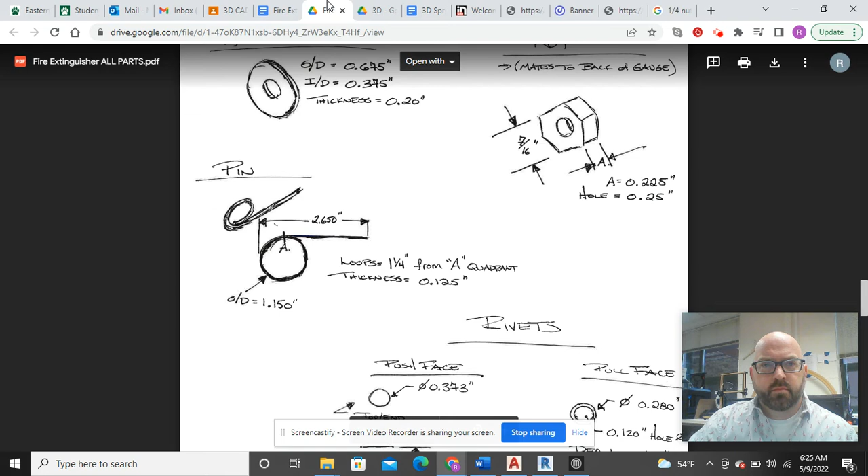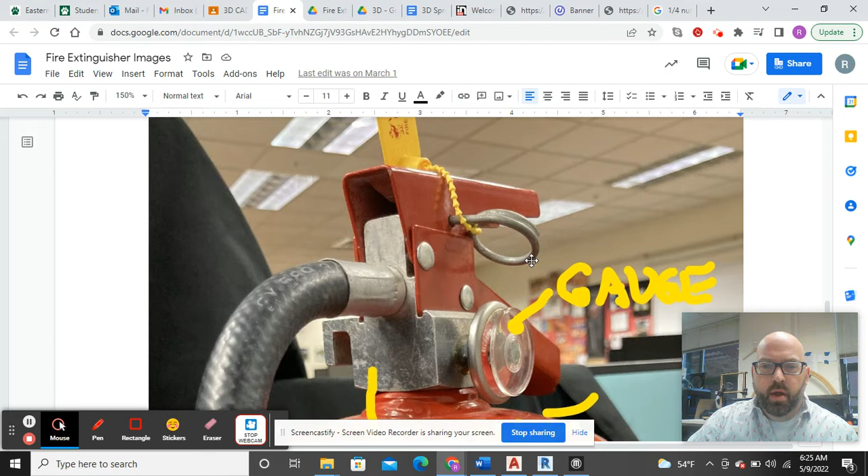All right, so getting down to the end of, or almost the end of some of the smaller parts, the next part I'm going to draw is the pin. And the pin right here is the thing that you pull on the fire extinguisher. When you pull this pin, this top handle, when you grab it, you can squeeze this together. And what it does is it opens a valve so that the ingredients, the stuff inside the fire extinguisher, rushes out of this hose. With the drawing itself, I did a little sketch here.

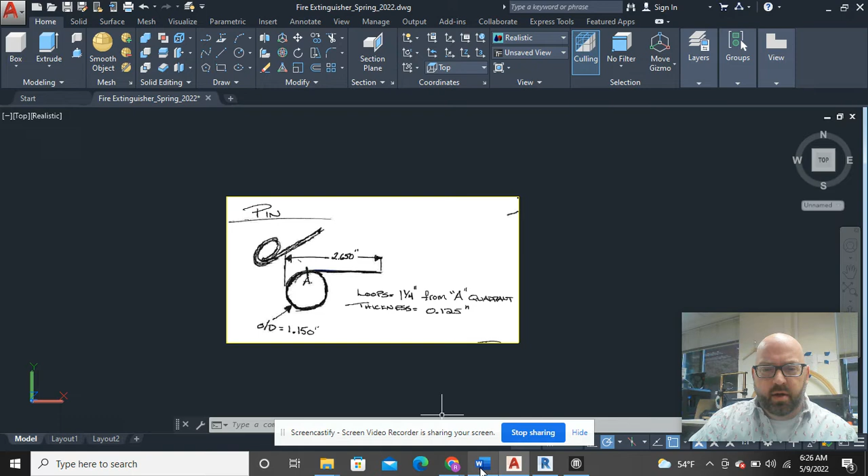It's an eighth of an inch in thickness, so it's just a piece of round stock bent at an eighth of an inch. There's an overall distance. There's a distance you have to calculate, and there is a diameter for the pin itself. And there is a little trial and error on this, and so I will try to remember my trial and error. But the one thing going back here is that there's this one note, and it says loops 1 1/4. It says inches, but what I should have said was turns. Or circumferences or something from a quadrant.

So you can see what I did was I marked A, and A is the intersection of the point where the pin is in a straight line, and then the second portion of that is where the loop on the spiraled portion ends. So if I look right here and I start my mouse, I say, okay, the pin is going straight through the handle, and that's all straight. And it gets to here where my cursor is, and that's what I called quadrant A.

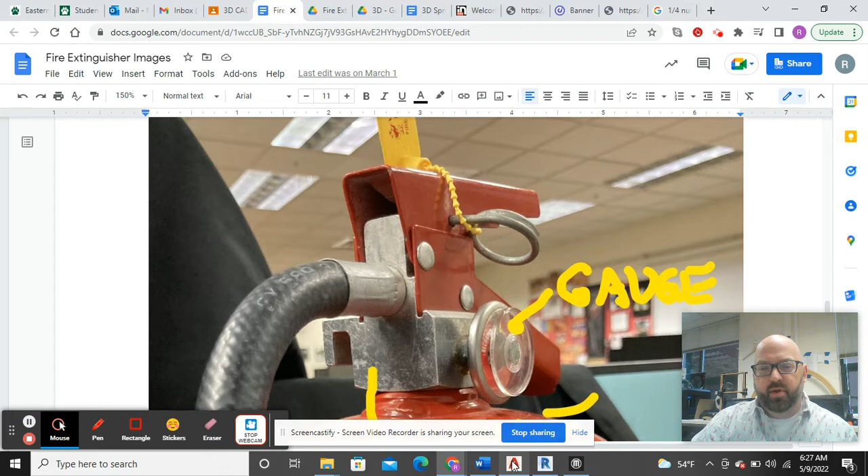If I follow the loop around, it goes all the way around, and then it hits quadrant A, and that's one loop. And then it passes quadrant A, and if you look how far it goes down, if we called this like quadrant B, that would be a second loop. Or if we said, okay, this is starting at the 12 o'clock position, it goes down to 3, comes down to 6, goes up to 9, comes back to 12 o'clock, and then it keeps bending until it gets to 3 o'clock. Okay, so this involves some slicing, some unioning, some sweeping, and exploding, and everything else.

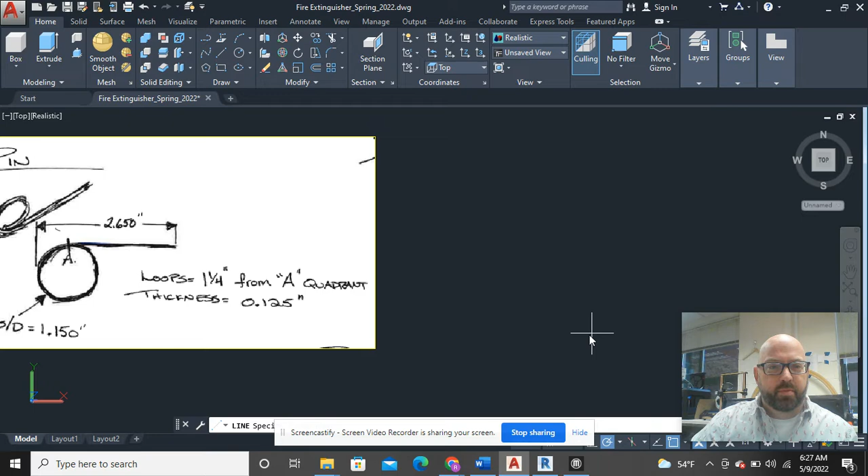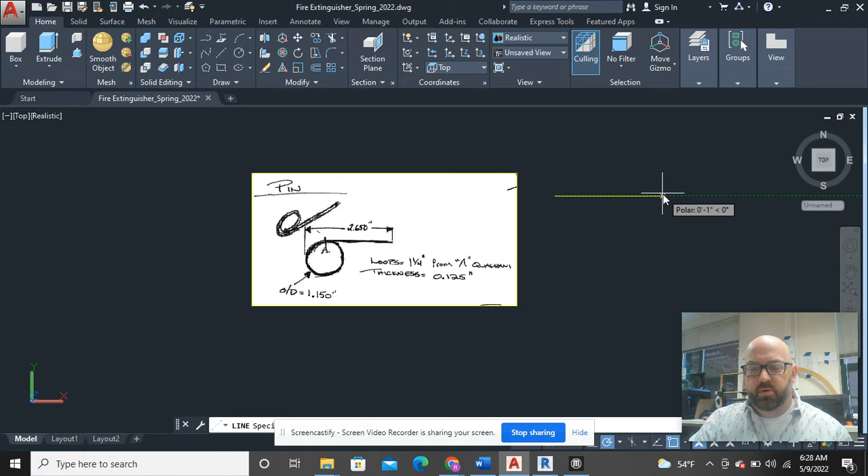So I'm going to start myself off with something to kind of contain my parts. And so I know that the outside diameter of this is 1.150, okay? And I know that the overall distance is 2.650, okay? Not 26.50. Whoops. Line 2.650. Okay. So there's that. Maybe I should have made this a little bit bigger.

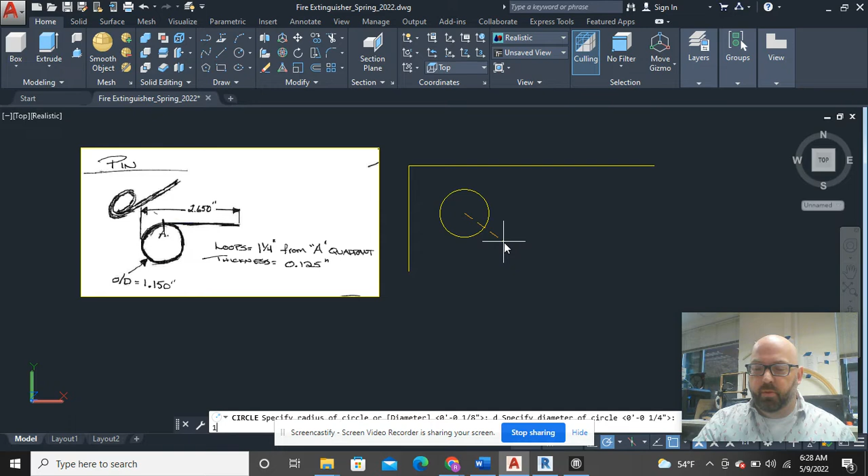And I know that I have right here, straight down from this, this end of it just coming down, and I'll just draw this into space. This is flush. This is where my diameter of 1.150 should exist, down here. So I'll go diameter of 1.150, and what I'm going to do is do 2 moves. One move is going to be, I'm trying to get it pushed down so it's straight away right there. It's intersecting. And then I'm going to do one other move, keeping polar on from this quadrant to here, and that's intersecting.

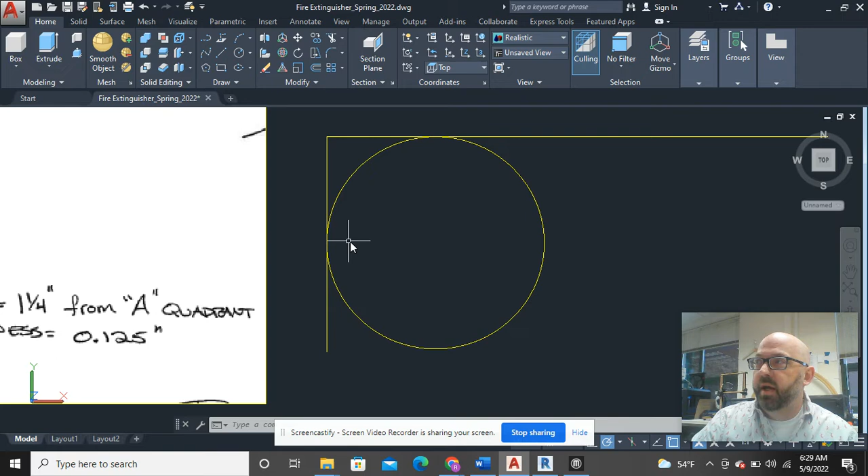Hey, Mr. Bank, can I get back with you? I'm doing a video right now. Cool.

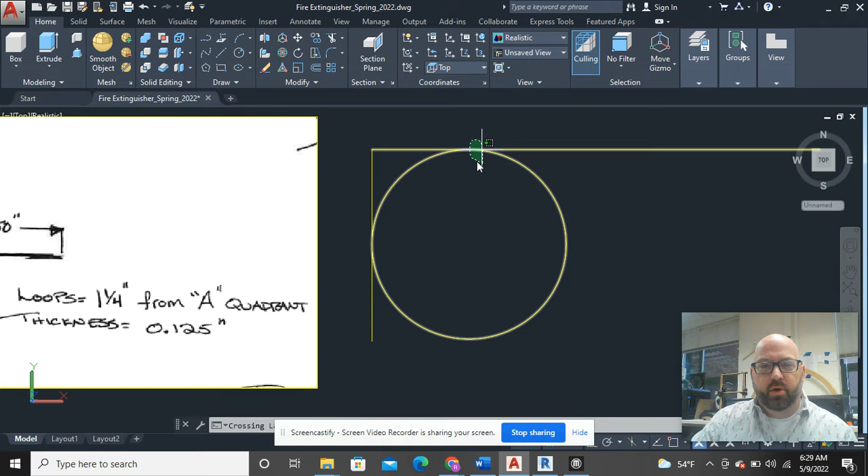So there we go. I've got a circle and I've got a straight line, and now I'm all set up. So what I can do is draw a line. I know that my pin length goes to this quadrant on the circle, and that was the unknown distance. Okay, so what I would do is I would go to my pin. I would lock my construction layer, and then I would draw a line that just goes from here to right there. Okay, and this line, oops, I might have locked the wrong one.

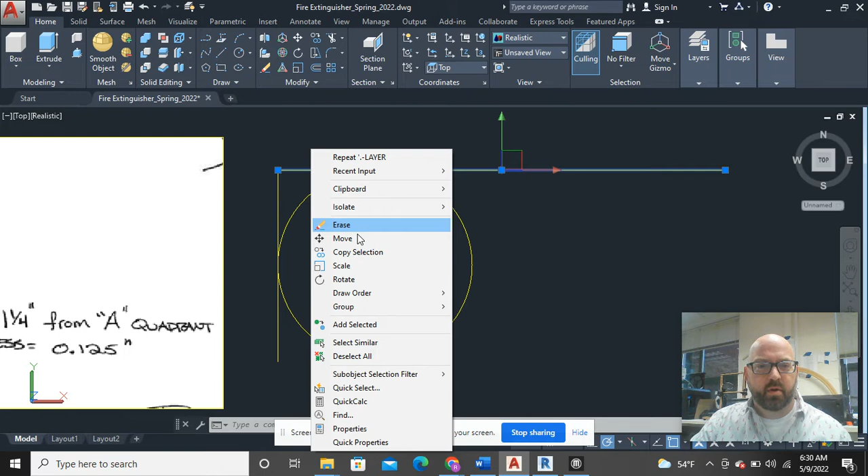Nope. This line, I'm having trouble getting my pin line off of it, but let's see if I unlock my construction layer. Maybe I have to switch. Okay, so I can get this. I'll move this out of the way. And this line right here is the length of the straight section of the pin. Right at the end of that, I can draw a circle with a diameter of 0.125. That's an eighth of an inch. The pin layer is really hard to see, so I'm going to do a little bit of a color change here. Pin.

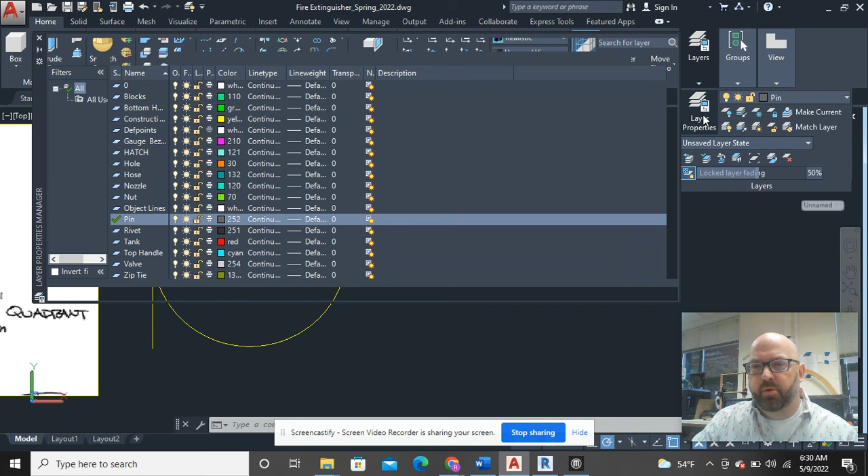I might as well just make it. I'll make it blue. Okay. All right, that'll be better. So now I'm going to use a tool that I don't use very often, but I'm going to go to a Southwest isometric, and I'm going to use under draw.

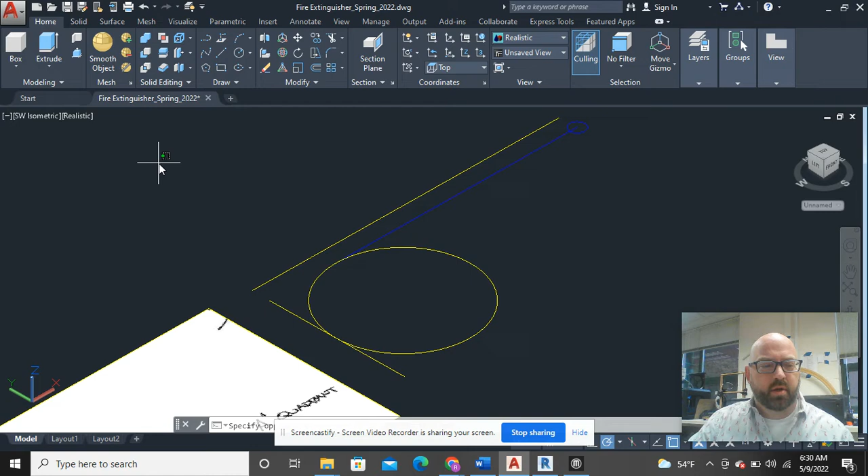You'll see the top left tool, so it's in the drop down. You can see I just clicked draw. You have the Helix tool. So Helix works just like a circle, but you have two diameters. So if I click Helix, I start the tool, it asks me for a center point. That center point sure doesn't look like the center of that circle. That looks more like it.

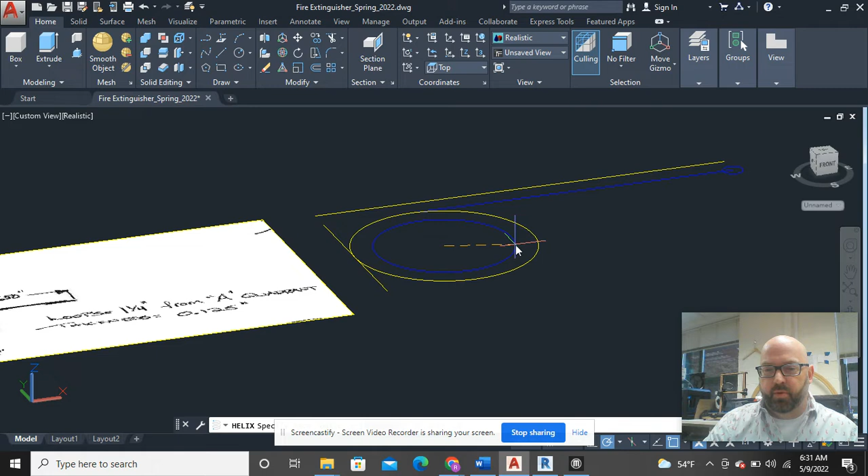So if I entered one diameter, let's say I said the diameter had to be 0.7, just showing you how that works. And now I go to, and my Helix froze. Okay. The second diameter is the top diameter. So you have to enter the diameter twice. In this case, the Helix is the same on the top as it is on the bottom, but in what I just did, it's not at all.

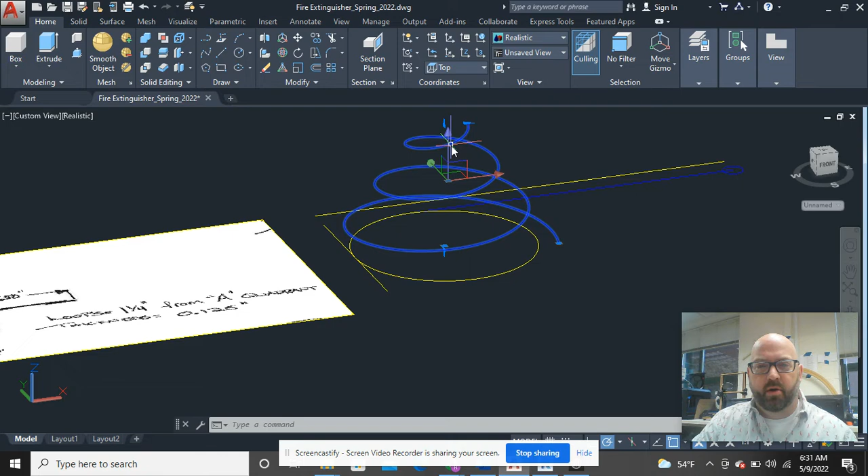Okay. So all you have to do is enter. We know that the diameter is 1.15. So I'll go Helix, and I'll grab right here. Now, rather than having to enter that number again, you can just snap to the quadrant, and that will guarantee that the Helix is the same exact size. Now you can see it's saying right here in the command window, what is the top radius or diameter? And this is where I click again, 1.150.

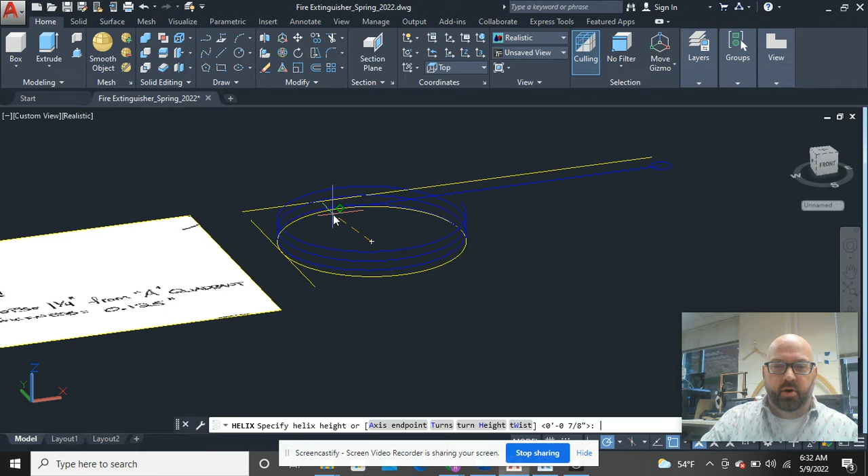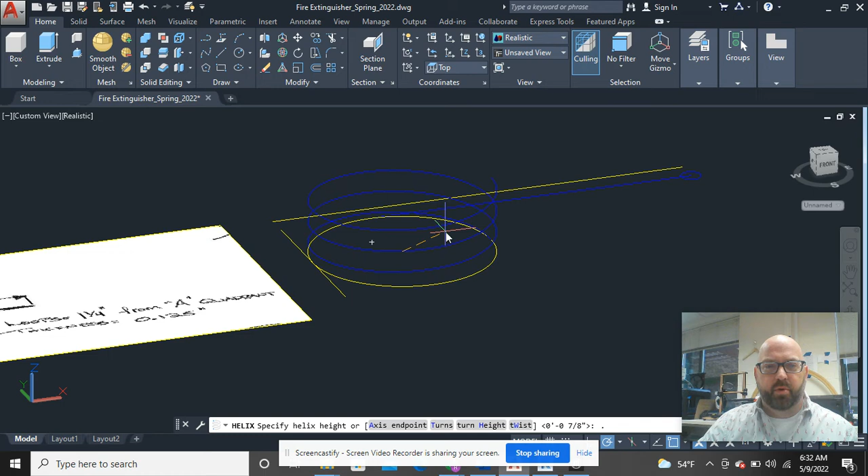So now you can see my Helix is following the same pattern all the way around. This is where I had to guess a little bit, and if I recall, I think I made this point 0.125, and you've got to think about a circle that's 0.125 nearly touching itself, so maybe this is the thing to do. Draw a circle with a diameter of 0.125.

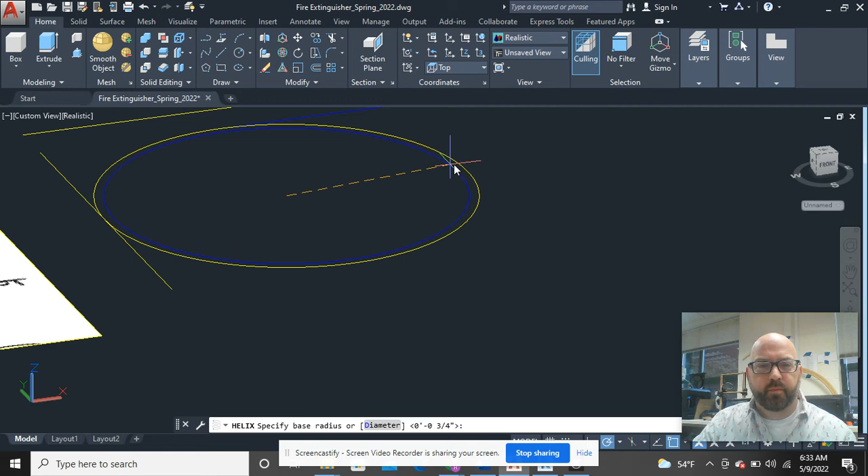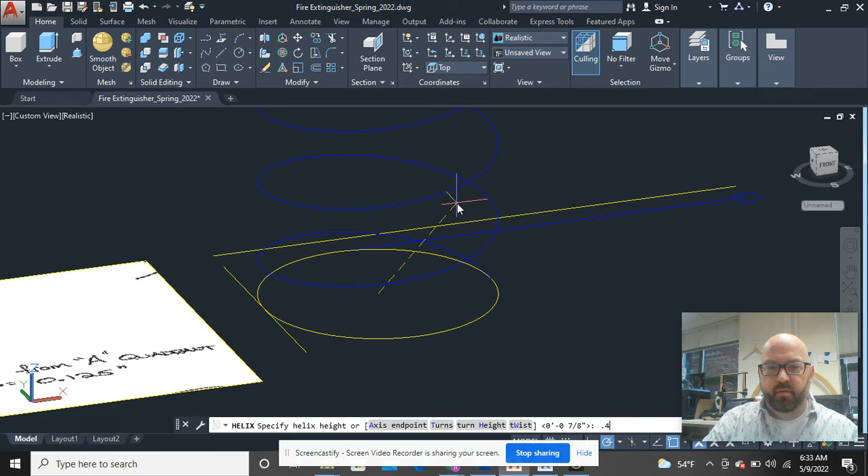We have to figure out what the height of this helix has to be so that it creates enough space so that one circle can sweep on top of the other part. So I think what I did was I figured out through some trial and error that it had to be 0.4. Helix one more time. Let's try this one more time. Helix. Starting from center, diameter 1.150. Top diameter 1.150. Height 0.4. Okay. And that hopefully is enough.

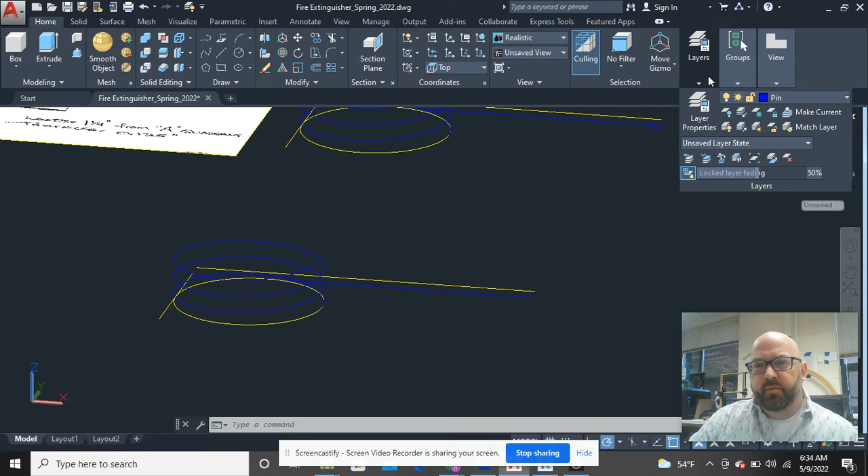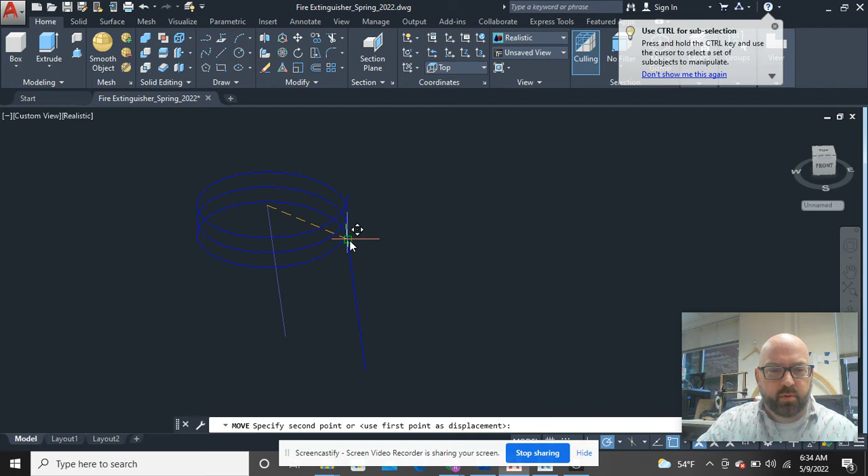So the thing you can do is copy all the work you did. And this is what I was saying is the trial and error portion. So copy the work you did, swing it over with polar lit up. There we go. And now turn off the construction layer. And what you want to have happen is you want this line that leads into the helix to go straight in. So I'm going to rotate this around this hoop, negative 90 degrees. And now I'm going to move this to that part. So you can see now my helix is in a straight line with the pin.

Okay. I would join also, grab my circle, so that it travels down the path.

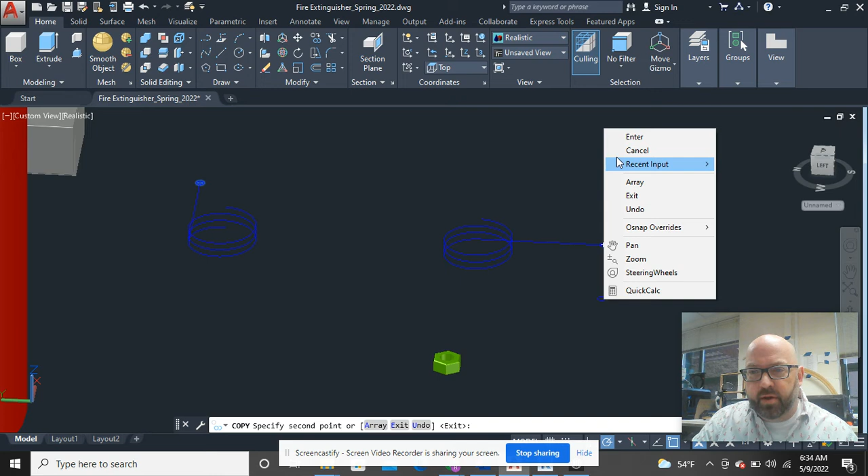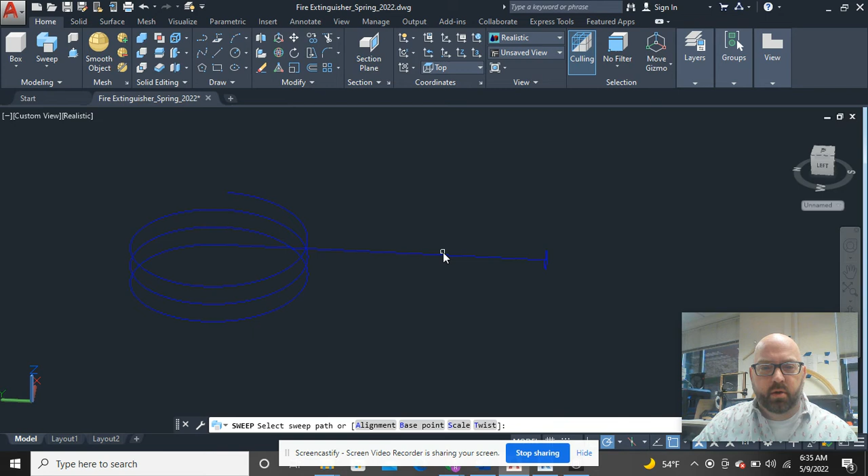So that the circle travels down the path, what I would do is go ahead and join the straight line with the helix. Right here and here, those would be joined. Now you can see when I hover over it, it's one thing. And now I'm just going to use my sweep tool. One of two things is going to happen. It's going to say it's unable to sweep, so let's see what happens. Click that, right click enter, click this, and hopefully, oh, it did. It's swept. So that is perfect.

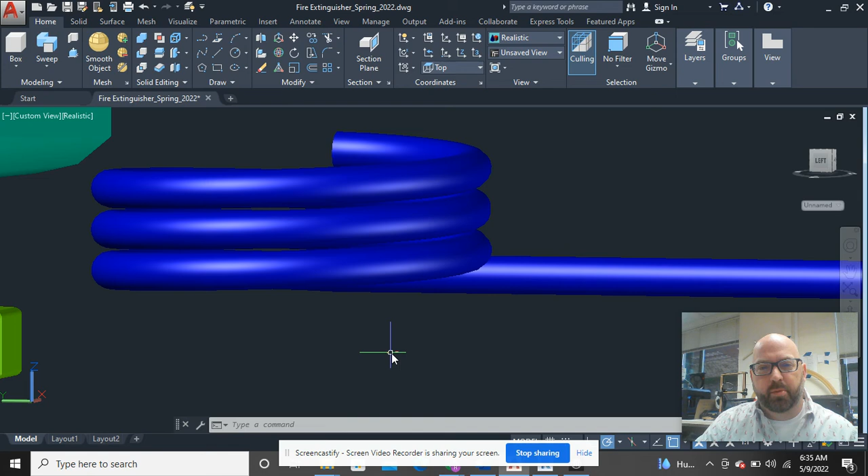0.4 would be that height distance, okay? And that allows you to sweep this all the way around. If I had said 0.3 or something, if that wasn't tall enough, this would be running back into itself. It would be self-intersecting along the pathway. If I made it 1, it would be real tall, and it would look more like a coil spring. Okay, so that is the first point, and I'm real happy with that.

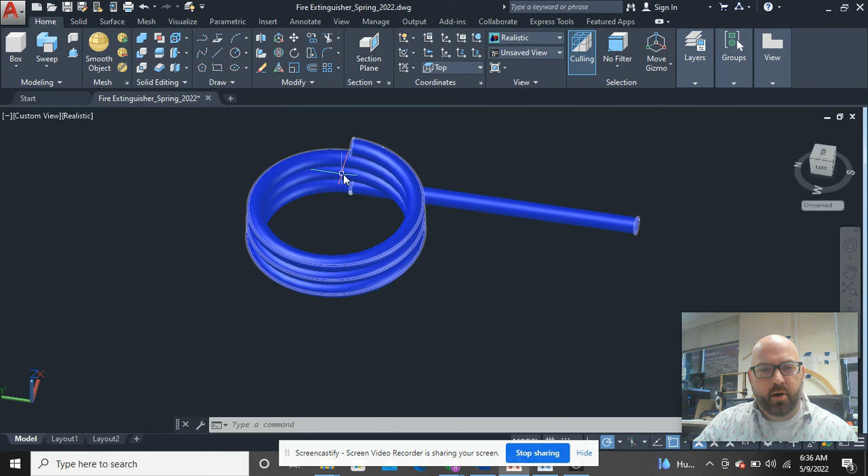So the second thing, remember we said that this has to take 1 1/4 turns, which means if I follow the pin, it has to go around 1 time, get back to here, and then go around 1 more quarter time. So I'm going to come back and do that on video number 2, deal with the slicing and making that up as it needs to happen.